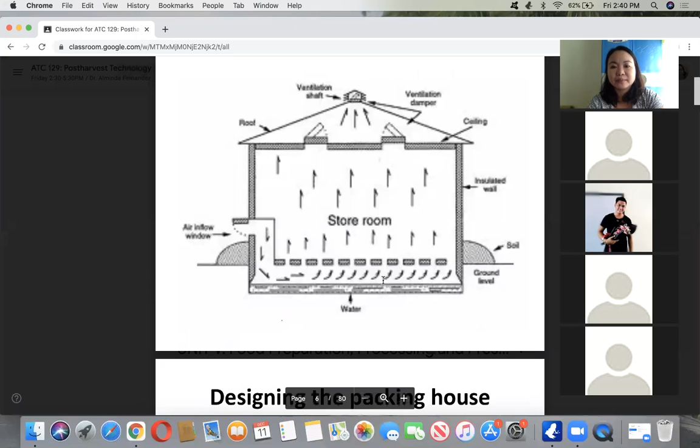And worker safety and comfort, of course, it should be well ventilated, no? And it also has a resting place for workers. And complexity of operation. So it should be flexible enough na daghan kayo o pwedeng isulod, and pwede na mga machines. And location should be as close as possible, with easy access to market. No? Within the city, if possible.

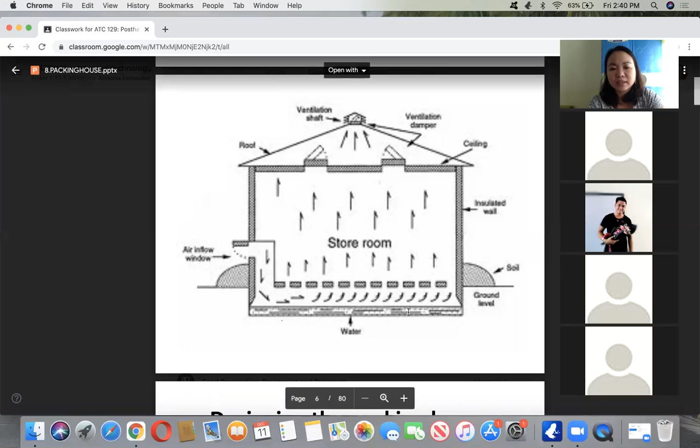So this is just a typical part of a storeroom. Mura lang siya kwarto that makes sure there is air inflow in the window. Of course, a roof. And that's why you see a ventilation shaft, no? Usually sa mga bodega. And a proper ceiling and insulated wall to protect it from very cold or very hot conditions. And even grounded level flooring so it won't be flooded.

So, if you are going to design a packing house, first you have to gather necessary information of the area for production, weather, and available resources. Then you identify packing house operations, which we already knew from the last chapter. So first we have collection, harvesting, and then transport, and also cleaning, etc. Determine floor area requirement: the receiving, sorting, working equipment, storage, office, and workflow.

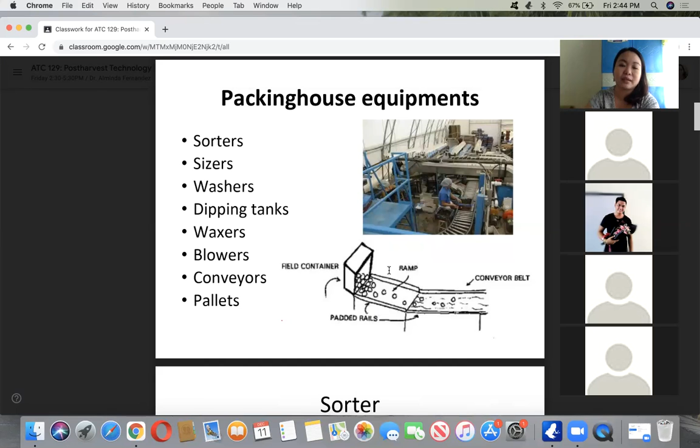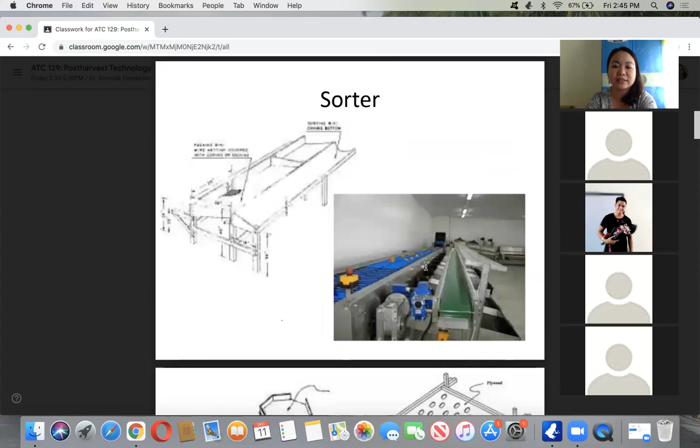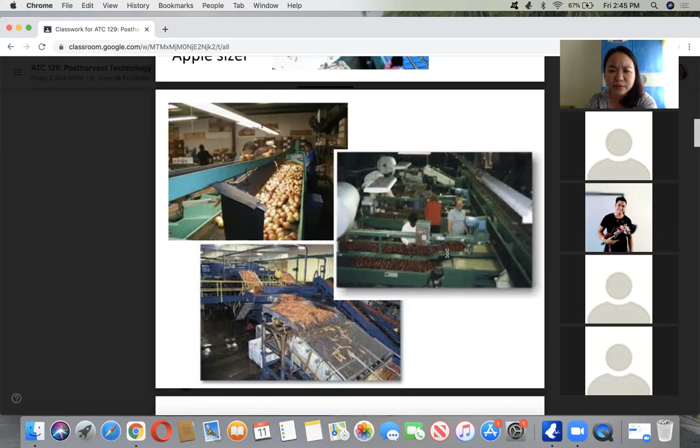So these are examples of sorters. This is where the different sizes come out. These are examples. And this is a citrus sizer. This is an onion sizer and apple sizer. So those are conveyors for carrots, for tomato, and I guess these are onions. So a banana washer, you have seen this in the video. And packing house equipment.

More, we have carts and forklifts, weighing scale, of course, packing tables, racks for air drying and drip drying or curing, containers, and a lot more miscellaneous equipment. By the way, equipment has no S, because it's already plural. So please check. Then plastic straps, improvised packing aids, impulse sealers, sticker applicators.

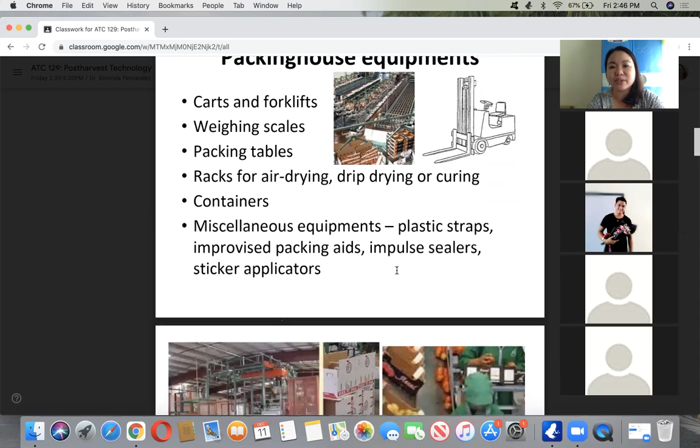So it's funny because what I used before, when I was working fully in food processing, food technology in Samoa, the sealers we used besides the airtight packing. The ones used to seal things in groceries. Have you seen that one?

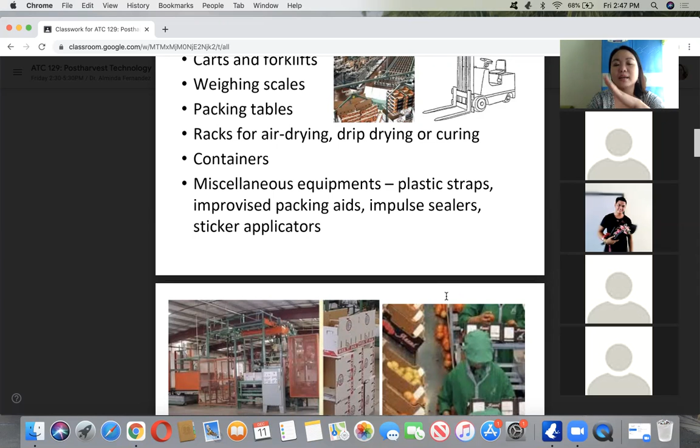Kanang i-ana lang gani siya, and then may plastic. So mo lang na siyang ginagamit, mga sealer. Or you can also make use of blower, para i-vacuum out nimo, baliktad sa blower, i-vacuum out nimo ang sulod sa cellophane para airtight na siya container. I don't know actually if you understand what I'm talking about, but if we still have time, I can show you some videos.

So these are examples of pallets and cartons inside. So ito yung mga pagsisleeve, and even mechanical robotics; this one is actually a form of robotics na naka-conveyor.

So inside the packing house and also along transport, very important in storage, is pre-cooling. Sometimes this is applied for some commodities, although not all. This is the rapid cooling of a commodity to the desired temperature soon after harvest, before storage or transport. So how do you do this? Bring down the temperature of a commodity to the optimum level as rapidly as possible without inducing physiological disorder or damage. Like for sweet corn, it must be cooled for 2 hours. So that's pre-cooling, not really frozen. I know that's very risky, just like the hot water treatment in mango, pero it's really done as part of post-harvest technology.

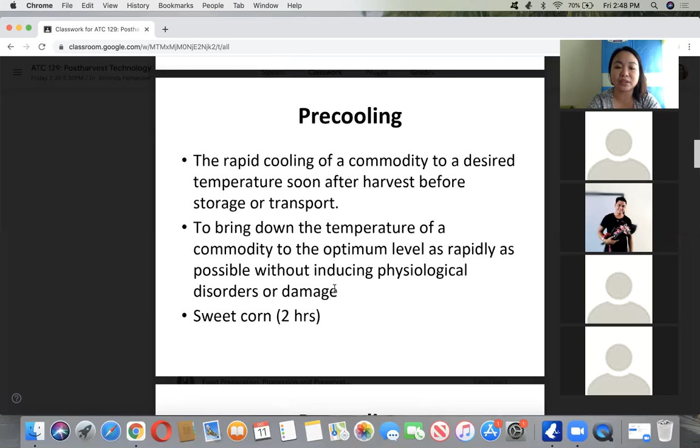So the benefits are excellent quality of produce is maximized because it can extend shelf life if it is for storage, transport, or export, and it minimizes refrigeration load. Pag bugnaw na siya daan, then i-cool storage nimo siya, it doesn't need a lot of cold para i-absorb niya ang coolness. It allows ripe fruit to be transported or stored.

It's the same principle when you want to make an ice cream. Have you made ice cream before? Kabuhat na mo sa inyong house? Homemade ice cream. So, ipabugnaw niyo daan ang mga ingredients like the milk, the creamer, sugar, para inig-mix mo, bugnaw na siya, and gamay na lang ang time para ma-frozen siya.

And it also allows ripe fruit to be transported if it is pre-cooled already. But the drawbacks are high capacity systems required. Siyempre, kailangan mo ng cooler, high cost of capital equipment, maintenance and operation, and small farmers cannot afford it.

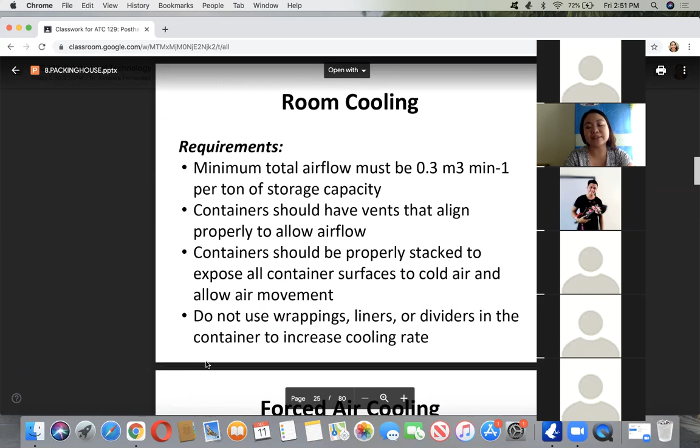So there are pre-cooling methods. Meron tayong tinatawag na room cooling, placing stocks of produce in a refrigerated space, like for cut flowers, potatoes, sweet potatoes, citrus, and onion. The advantage is lower capital and running costs. But slow cooling rates, variable temperature distribution, limited to commodities with lower respiration rates. So kung gagamit ka lang ng air-conditioned room. The requirements: even though kino-compute niyo yung total airflow, containers should have vents that allow airflow properly, stacking of containers should be exposed lahat sa cold air and allow air movement, and do not use wrappings, liners, or dividers in the container para lahat talaga well-distributed ang cold.

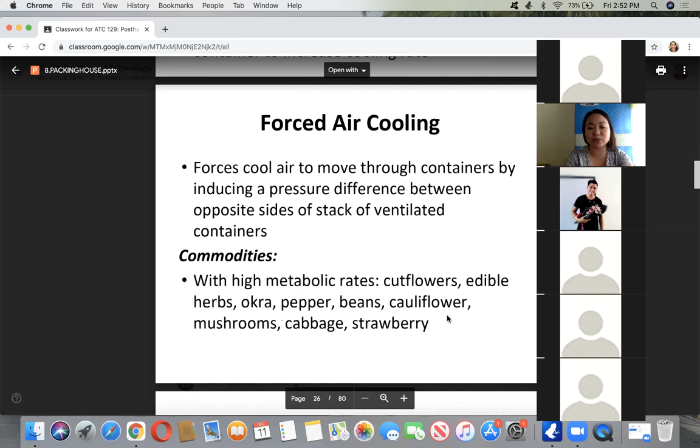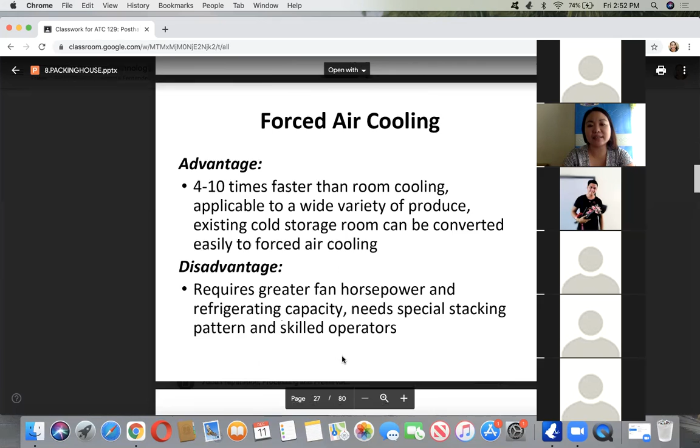Aside from room cooling, we also have forced air cooling. This uses forced cool air to move through the containers by inducing a pressure difference between opposite sides of a stack of ventilated containers. This is used for commodities with high metabolic rates like cut flowers, edible herbs, okra, pepper, beans, cauliflower, mushroom, cabbage, and strawberry. The advantage is it's 4 to 10 times faster than room cooling, it can be applied to a lot of foods, and existing cold storage rooms can be converted to forced air cooling. But the disadvantage is greater horsepower and refrigerating capacity needed, and it needs special stacking patterns or skilled operators. It must have sufficient vent areas without weakening the package, about 5 to 6% vent in the end wall side, and avoid bags, liners, trays, and dividers that block vents.

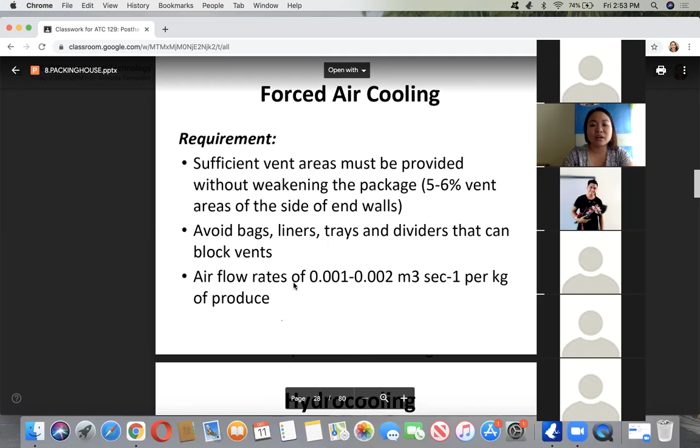Aside from forced air cooling, we also have hydro cooling, contact with cold water by immersion or shower system, for asparagus, leafy vegetables, sweet corn, snap beans, celery, topped carrot, radish, longan, and lychee. It's simple to perform and very effective, 2 to 3 times faster than forced air cooling, and reduces or reverses moisture loss. So imagine hydro cooling is 3 times more effective than forced air, which is 10 times more effective than room cooling.

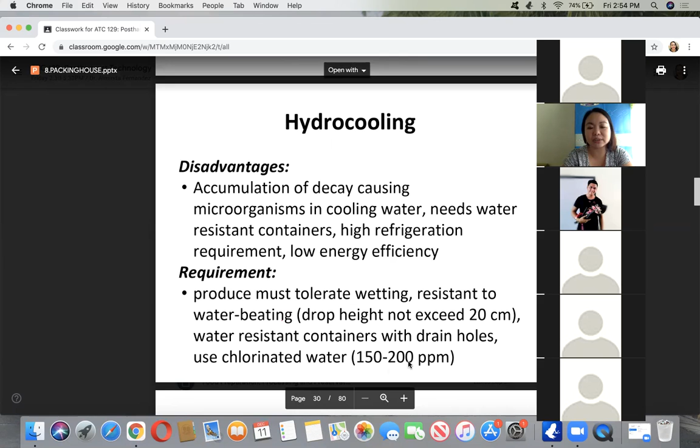But the disadvantage is accumulation of decay-causing organisms in the cooling water, it needs water-resistant containers, high refrigeration requirement, and low energy efficiency. It also needs produce that tolerates wetting, resistant to water beating, drop height not exceeding 20 centimeters, water-resistant containers with drain holes, and chlorinated water of about 200 ppm. Another one is hydro air cooling.

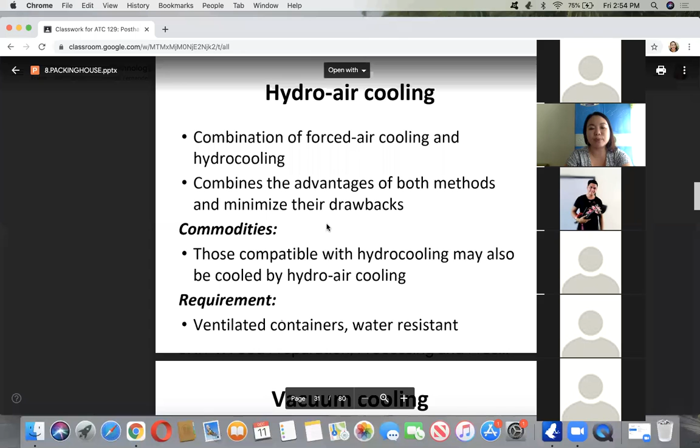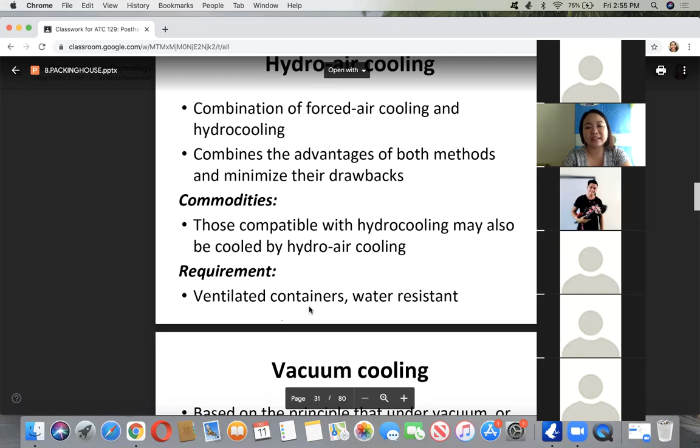So hydro cooling, and this one is a combination of hydro, water and air cooling, a combination of forced air cooling and hydro cooling. So advantages of both, of course, and minimize their drawbacks. Those compatible with hydro cooling may also be cooled by hydro air cooling, and it needs a ventilated container and water resistant equipment. So aside from those combinations, we also have vacuum cooling.

So more high-tech again, based on the principle that under vacuum or conditions of reduced pressure, water evaporates at a lower temperature. So if you vacuumize the water, it becomes cold, no? And this is used for celery, parsley, lettuce, leafy vegetables, broccoli, cabbage, bell peppers, sweet corn, and so on. And the advantage is quick and uniform cooling, very efficient compared to the rest.

But the disadvantage is it's very expensive and only applicable for high surface area to volume ratio commodities that lose water readily from tissues, so weight loss may occur. So it needs an airtight chamber that can withstand vacuum and is capable of reducing pressure up to 4.6 mmHg, and cooling coils to condense evaporated water inside the chamber with high surface area to volume ratio.

And then we also have the most commonly used by our small scale farmers, the icing, no? So it's based on the principle of heat absorption during phase change of a substance. So heat is taken from the commodity, therefore producing the cooling effect. So you package them with ice, liquid ice, top icing. Except for broccoli, green onion, sweet corn, strawberry, baby corn, which should not be in direct contact with ice, because they get damaged more easily.

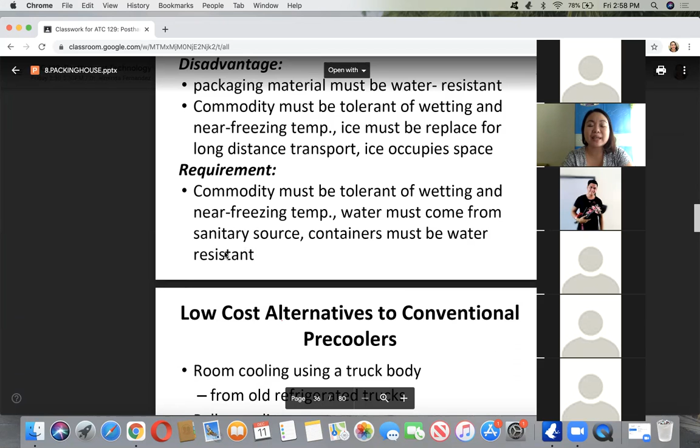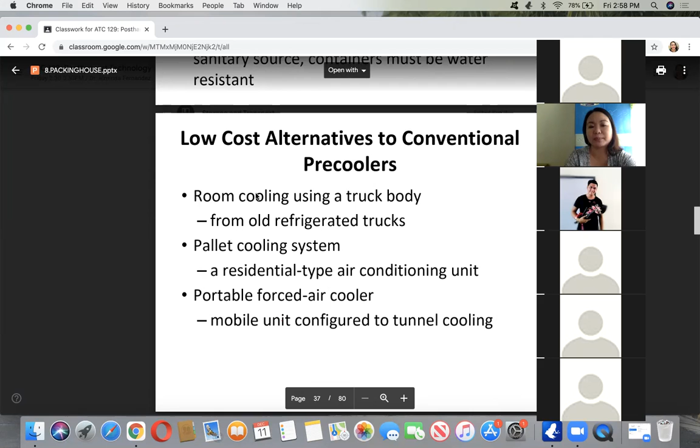So the requirement is the commodity must be tolerant of wetting and near freezing temperature, and containers must be clean, sanitary, and water resistant. But there are also low-cost alternatives to conventional pre-coolers, which include the following. We have room cooling using a truck body from old refrigerated trucks. So refrigerated trucks or vans that can no longer be used can be recycled, or the pallet cooling system, which is a residential type air conditioning unit. So that's what it's called.

So if you notice, there are even vans that are made into, not vans. So this, used as houses. Have you seen them? Yes, ma'am. Container vans used as houses, no?

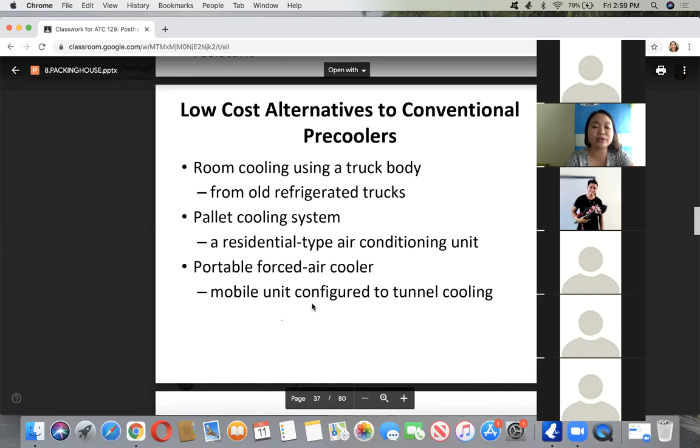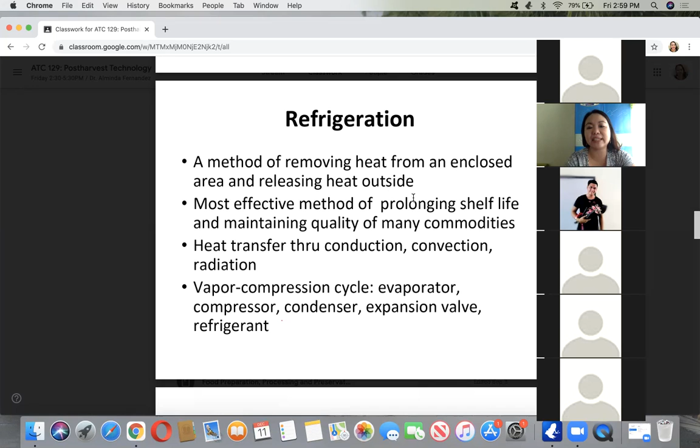And portable forced air cooler, a mobile unit configured for tunnel cooling. So that's different too. So we also have refrigeration, no? As a method of removing heat from an enclosed area and releasing heat outside. All the videos you saw on mango, on banana, and the other vegetables included refrigeration, if you notice on the video. And it's also the most effective method in prolonging shelf life.

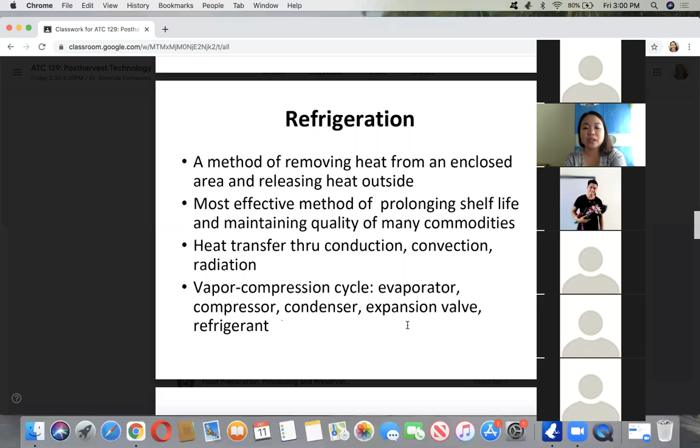So, the most effective method of prolonging shelf life and maintaining the quality of commodities. The principle behind this is conduction, convection, and radiation, and the vapor compression cycle. And you know, if you studied refrigeration before, there's an evaporator, compressor, condenser, expansion valve, and the refrigerant, or what they call frigidaire. In Bisaya, frigidaire. Actually, that's just a shortcut from our ancestors. But the right name is refrigerator.

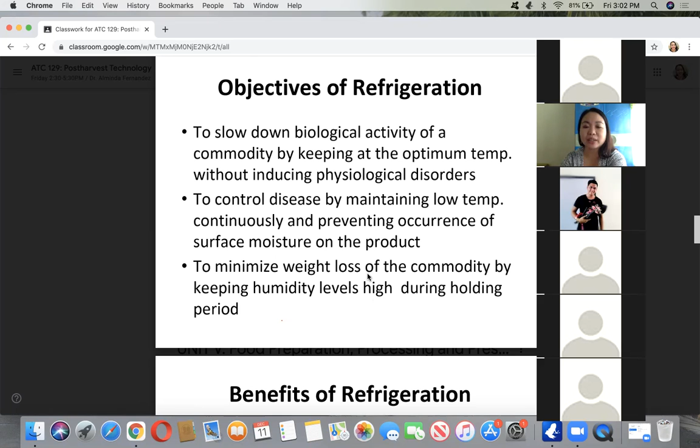So, the objective of refrigeration is also to slow down the biological activity of the commodity, the chemical and physiological processes, keeping it at the optimum temperature. As you know, when the temperature is high, the more metabolic activity. When the temperature is low, near freezing, without inducing physiological disorders. It also controls disease by maintaining low temperature continuously and prevents the occurrence of surface moisture, which affects microorganisms when wet. It minimizes weight loss of the commodity by keeping humidity levels high during the holding period.

So those are the objectives. So therefore, the benefits: it will allow the farmers to wait for a better price for their produce. So they can store it, right? They can sell it later. And it even outs the supply of a commodity during the year. And increases the volume, sales, and income by reducing waste or spoilage so it doesn't get spoiled.

These are the different facilities and equipment for storage and transport. We have pre-coolers, room cooling, forced air cooling, pressure cooling, hydro cooling, vacuum cooling, package icing. We also have refrigerated trucks or vans, cold storage, and refrigerated displays.

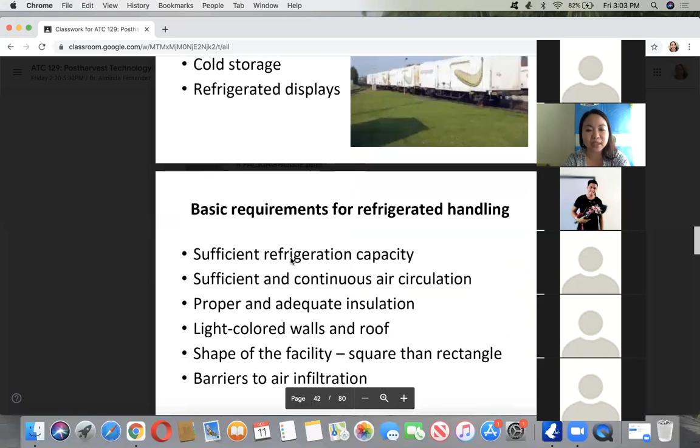Actually, they're all pretty similar, right? But you know, by engineering design, they are so-called different based on their design, manufacturing, and uses also. So if you're going to do refrigerated handling of your commodities, there are basic requirements.

This includes sufficient refrigeration capacity, sufficient and continuous air circulation, proper adequate insulation.

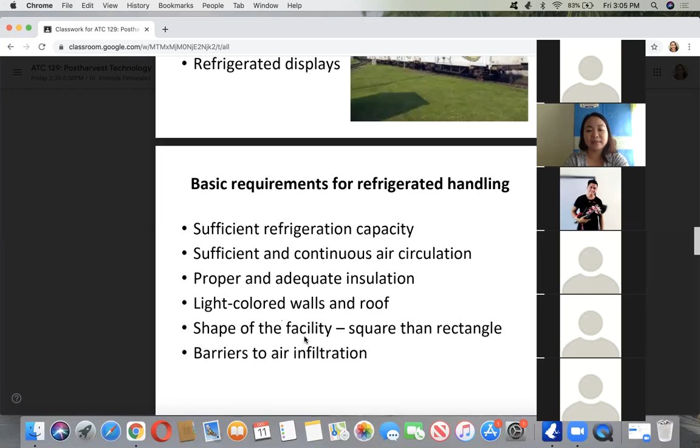So, shape of the facility: square is better than rectangle. Why? Because in a square, more different sizes of square can fit, regardless of the whole size. That's better than a rectangle. Then, barriers to heat and air infiltration.

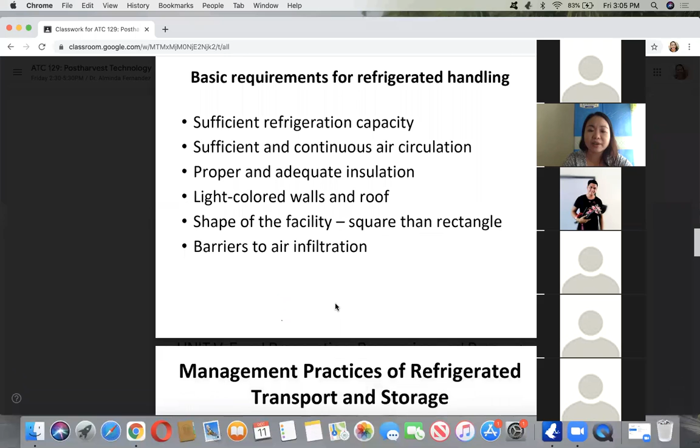So these are the basic requirements. So how do you manage practices of refrigerated transport and storage?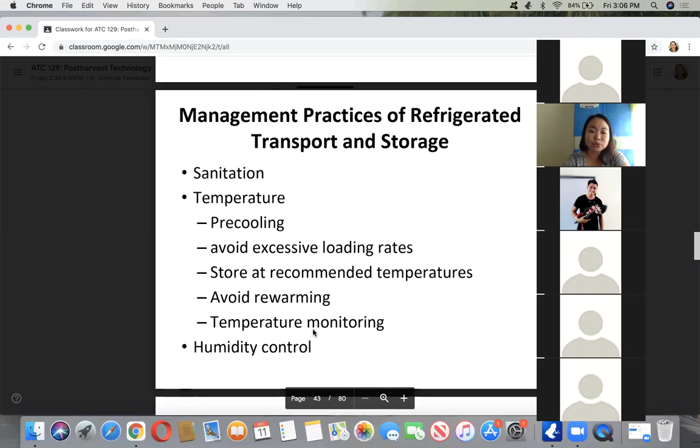We have here sanitation, it needs to be really clean. Temperature for pre-cooling, avoid excessive loading, storage at recommended temperature, avoid rewarming, like thawing our commodities, especially for meat. You freeze that and then let it thaw properly. Temperature monitoring and humidity control.

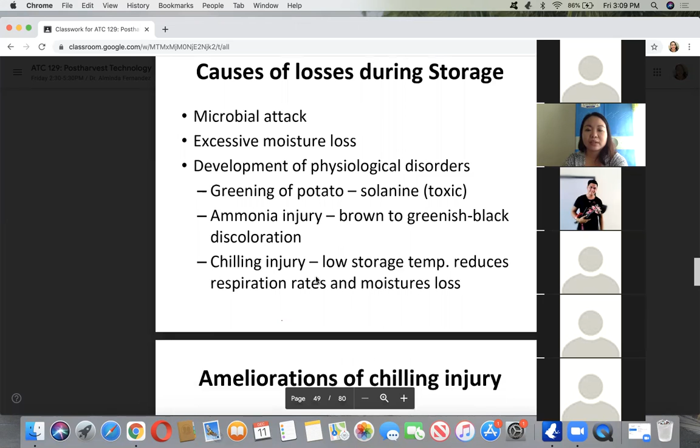So causes of loss during storage can be due to microbial attack, of course, and excessive moisture loss, weight loss due to respiration, and development of physiological disorders like greening of potato. When it turns green, be careful, it has solanine. And ammonia injury causing brown to greenish black discoloration, and chilling injury from low storage temperature, which reduces respiration rates and moisture loss.

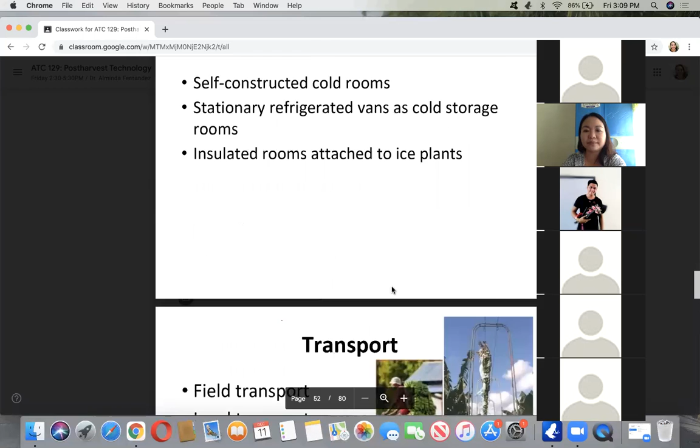So we have less than a minute now, so maybe I will just continue the discussion next meeting on transport.